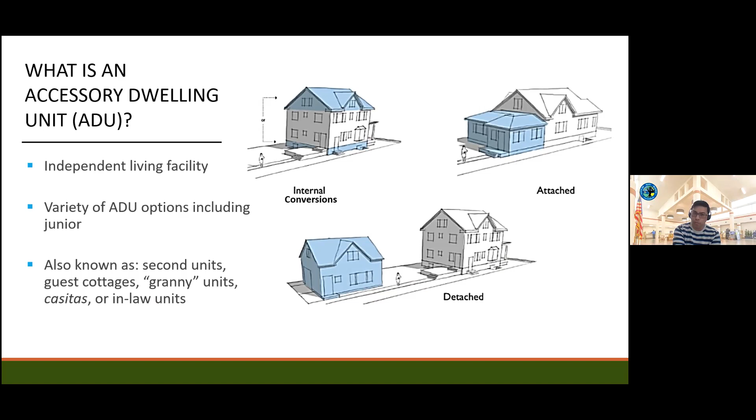They can be attached or detached, constructed as an addition or as a conversion of an existing space or accessory structure, including garages, sheds, pool houses, things of that nature. And under state law, I did want to mention that manufactured or tiny homes meeting certain requirements are also defined as ADUs.

So what is a junior accessory dwelling unit, or a JADU? A JADU is contained entirely within the walls of an existing or proposed single-family residence. JADUs are not permitted in multifamily zoning districts. This is typically a conversion of an existing bedroom or an attached garage. One of the primary distinguishing differences between an ADU and a JADU is that a JADU may share bathroom facilities with the primary residence.

Before we go into the specifics of the new state regulations, it's important to go over some of the key terms that you'll be hearing throughout this presentation. We'll have plenty of time at the end of the presentation, or during the presentation, to answer any questions and provide clarity before you respond to the poll questions.

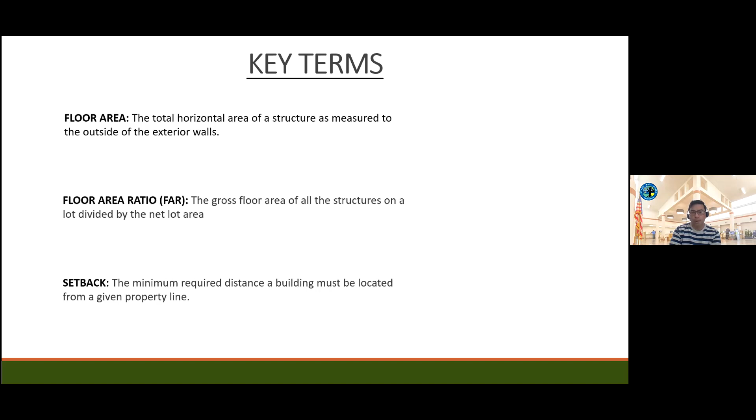We'll begin with floor area. Floor area is simply the area of a structure measured horizontally to the outside surface of the wall. In the example shown on the screen, you have a structure measuring 20 feet by 50 feet, which means the floor area for the structure would be 1,000 square feet.

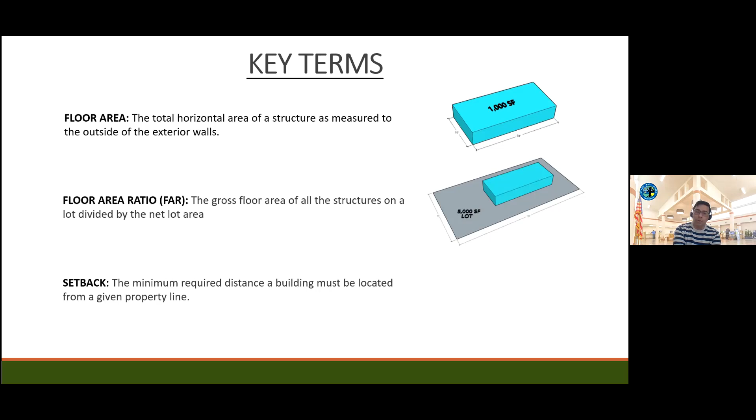The second key term you'll often hear in conjunction with floor area is floor area ratio. You get FAR by calculating the total floor area on a given site and dividing it by the lot area. Using the same example of the 1,000 square foot structure, you have a 5,000 square foot lot. That would end up being calculated as 20% FAR for the site. Each of our zoning districts prescribes its own maximum FAR for development.

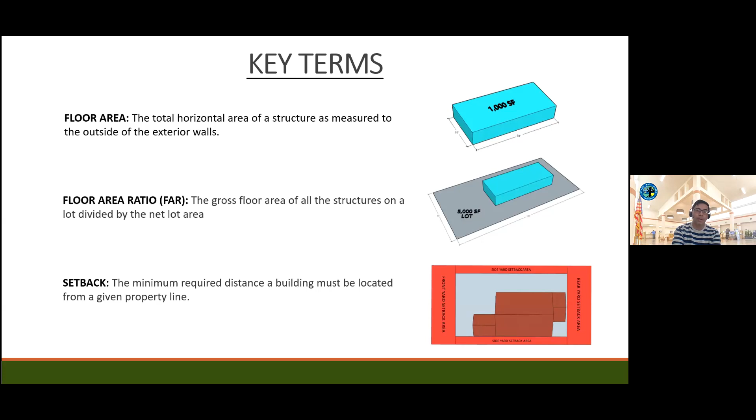Another key term you'll hear referenced is setback, or required setback area. The setback area is the minimum required distance a building must be from a given property line. The area within a required setback is generally required to be unobstructed by any structure or building. The red areas shown on this graphic represent the front, side, and rear setbacks. The gray area in the center of the lot is the buildable area, and that's where you can locate your building or structure.

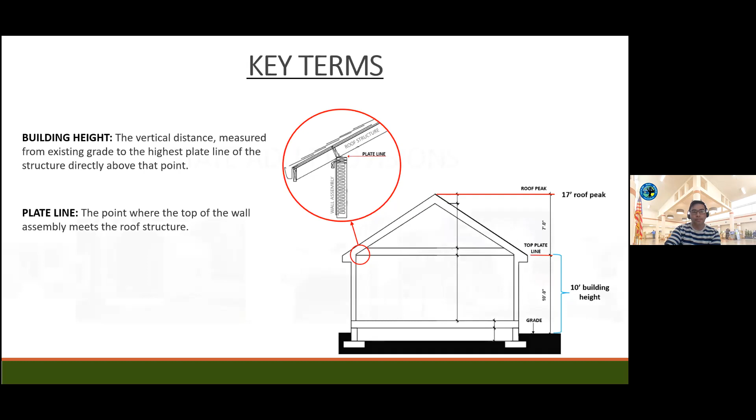The next few slides will discuss the provisions of the new state ADU regulations. Our existing local ordinance is not in complete compliance with the new state regulations, so we're currently imposing only those aspects of our code which are not in conflict with the state. Areas which are in conflict, we're simply defaulting to the state regulations, which we're going to go over now.

A good place to start in terms of what the new state regulations allow is with the state exempted ADU, or what we call a by-right ADU. The state requires that cities allow a property owner to build at minimum an 800 square foot ADU of at least 16 feet with 4-foot side and rear yard setbacks of no more than 4 feet. This by-right ADU is allowed regardless of any local development standard, including lot coverage, floor area ratio, open space requirements, or anything that would otherwise preclude it from being built.

This obviously opens up the doors of opportunity for ADU development in our city and across the state. Generally speaking, the remaining floor area ratio on a lot is what typically governs how that lot can be further developed.

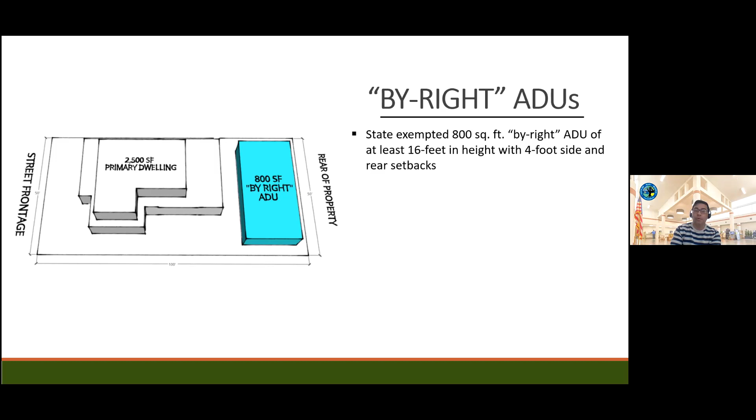In this example, we have a 5,000 square foot lot in an R1C zoning district, which has a prescribed maximum of 50% FAR. That means the maximum floor area, or total amount of structure that could be built on this lot, would be 2,500 square feet. In this scenario, you see the representation of a 2-story home that's maxed out at 2,500 square feet.

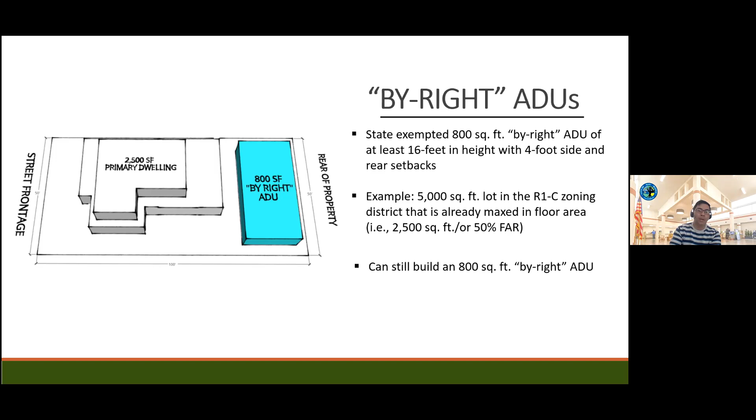What the state exempted ADU, or by-right ADU, provides is that regardless of this lot already being fully developed with 2,500 square feet, the state says you can still build an 800 square foot ADU that's at least 16 feet in height with 4-foot side and rear setbacks.

The updated state law prescribes ADU size limits for agencies which don't have an ADU ordinance in place. Minimum and maximum size allowances are based on the ADU development type, which can be broken down into the general categories of attached, detached, and conversion ADUs, as well as the by-right ADU.

An attached ADU is simply a new construction ADU which is attached to either the primary residence or an accessory structure. We're currently defaulting to the state regulations that permit an attached ADU to be up to 50% of the primary residence's size. Please note that any new construction attached ADU must abide by the 4-foot side and rear setback requirement.

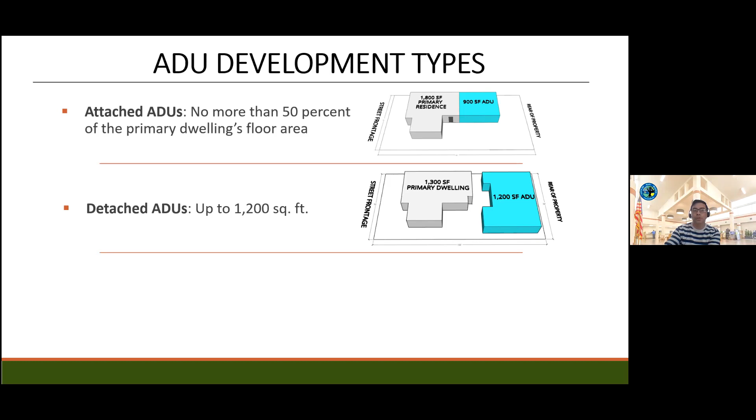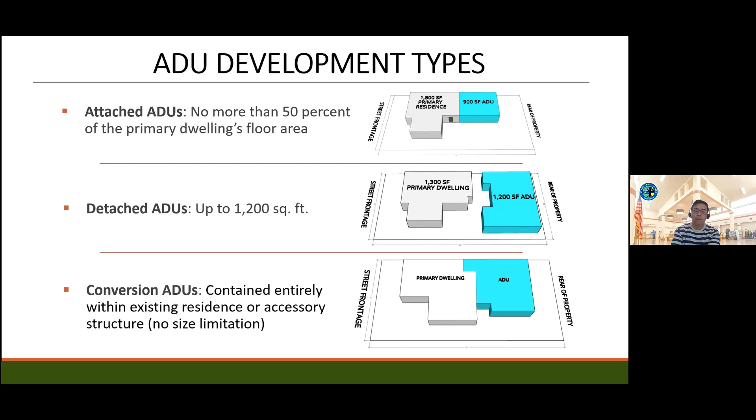So there's plenty of remaining floor area to potentially build up to the state maximum 1,200 square foot detached ADU in this scenario. An ADU conversion is simply a converted area contained entirely within the footprint of an existing residence or even an accessory structure. As such, you can utilize the existing setbacks, even legal non-conforming setbacks, provided that you build in the same location to the same dimensions. There is no size limitation on the area being converted since it's not creating new structure.

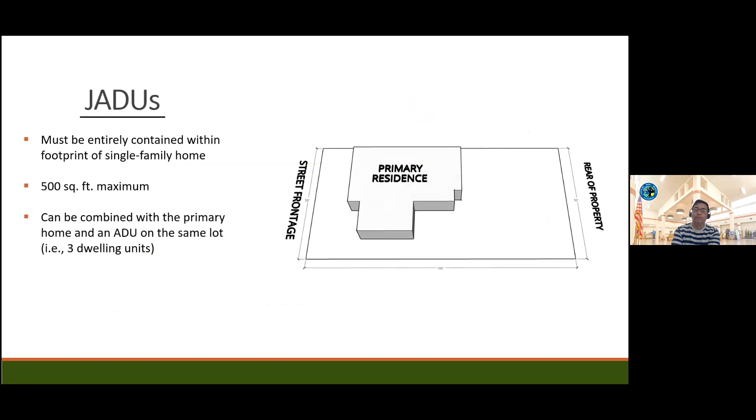JADUs must be contained entirely within the footprint of a single family residence. They're permitted to be up to 500 square feet in size and require exterior access apart from the main residence, as well as internal communication with the primary residence. The JADU must include at least an efficiency kitchen, meaning it must include a cooking facility with appliances, a food preparation counter, and storage cabinets. There's no required parking associated with JADU development.

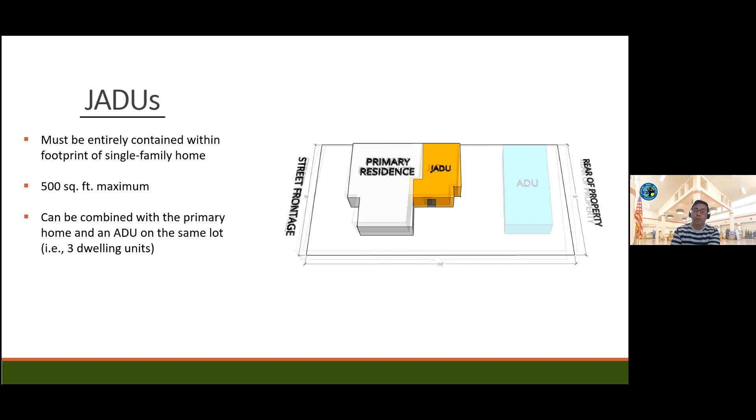One of the interesting provisions of the new state regulations is that it allows an ADU and a JADU to be combined on the same lot with a single family residence, so you effectively can have up to 3 dwelling units on the same lot.

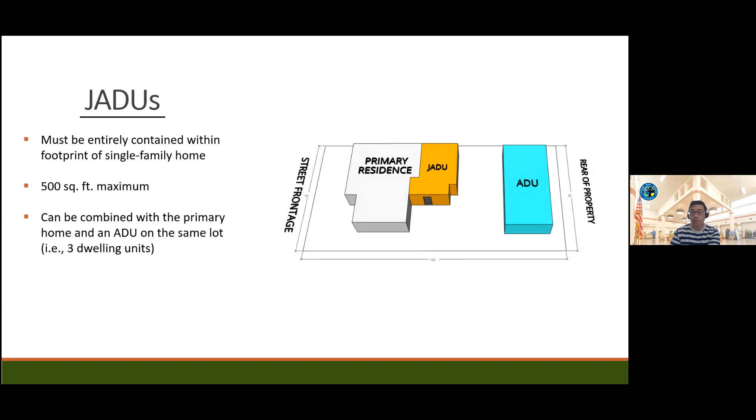We've discussed how we measure building height in San Mateo. So when we speak to allowing an ADU to be at least 16 feet in height, we're talking about allowing the plate height of at least 16 feet in height.

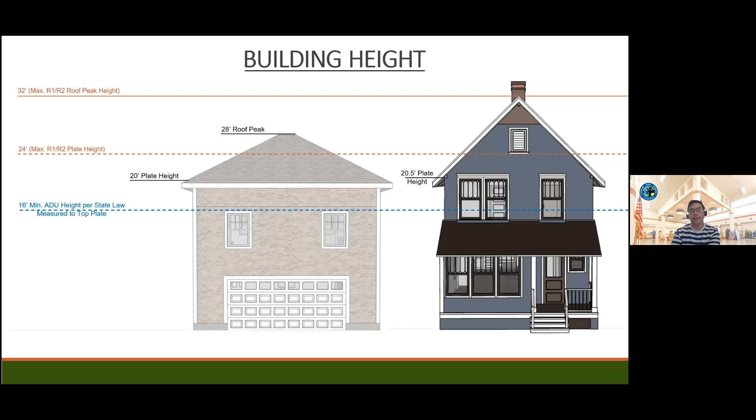With regard to parking associated with ADU development, the state requires 1 off-street parking space per ADU or per bedroom, whichever is less. The recent regulations continue a trend of being more permissive and not allowing required parking to be an impediment to ADU development. One of the new requirements stipulates that when you convert a garage or a carport, or demolish it in conjunction with developing an ADU in its place, you're not required to provide replacement parking.

Additionally, the state offers a number of parking exemptions that preclude the need to provide off-street parking associated with ADU development. Generally speaking, most properties in the city qualify for exemption number 1, which applies when an ADU is located within a half mile walking distance of public transit. Despite that, I wanted to note that approximately 10% of our residential properties are not located or would not satisfy that criteria, and therefore would be obligated to provide off-street parking associated with the ADU.

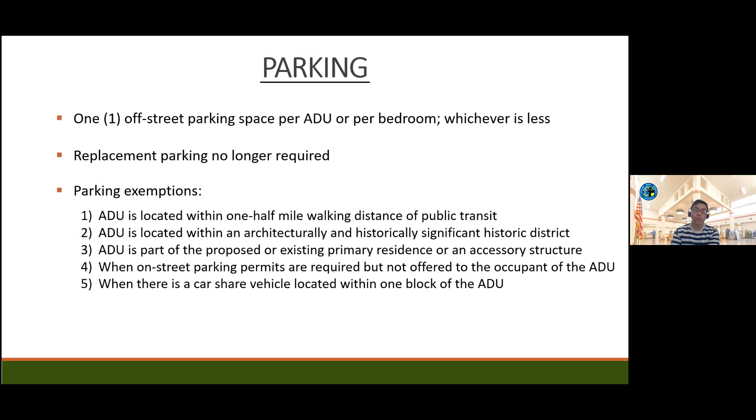In terms of additional special provisions of the new state law, the state law now provides a pathway for homeowners to defer correction of certain building code violations for up to 5 years upon request, provided that the correction of that specific violation is not necessary to protect health and safety. This obviously provides the benefit of legalizing many ADUs that cannot be brought up to 100% code compliance.

In addition, the state now allows ADUs to be developed on lots that have an existing multifamily development. So you can develop or have multiple ADUs within non-living spaces within a multifamily development, meaning you could have it in a boiler room, a storage room, carport, or garage. You can convert up to 25% of the existing units in that multifamily development into ADUs, as well as build up to 2 detached ADUs on that site.

At this time, I wanted to open it up to the attendees to ask any questions. I know that we went over a lot of technical information, and just by the nature of the topic, it's sort of dense and very nuanced. So I'm happy to answer your questions.

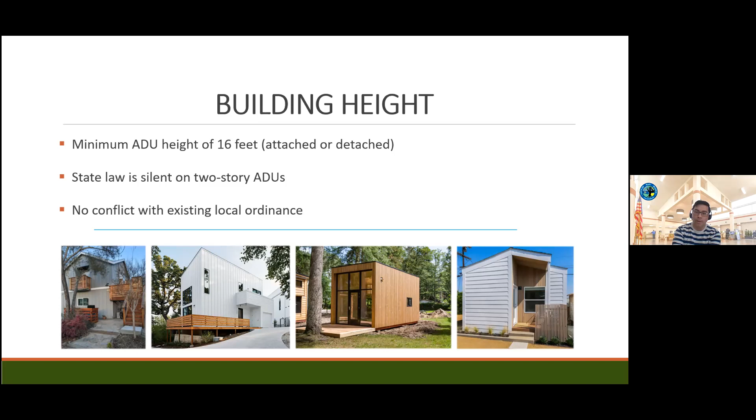State law establishes that an ADU will be allowed to be at least 16 feet in height. Our code currently defaults to the building height maximum specified by the underlying zoning district for ADUs. However, our existing ordinance was adopted during a time when ADUs were not permitted in multifamily zoning districts and were restricted to just 640 square feet. All of the residential zoning districts in our city allow building heights well above 16 feet, so we can continue to default to that underlying zoning district. However, now that ADUs can be built up to 1,200 square feet and built within 4 feet of shared side property lines, we're interested in hearing from you how tall detached ADUs should be.

Going back to that graphic we looked at earlier, these are 3 examples of proposed maximum plate and roof peak heights, which coincide with the answer choices on the poll: a 16-foot plate height with 24-foot roof, a 20-foot plate height with 28-foot roof peak, and a 24-foot plate height with 32-foot roof peak height, which is utilized by our R1 and R2 zoning districts. Mary, can you please pull up poll question number 1?

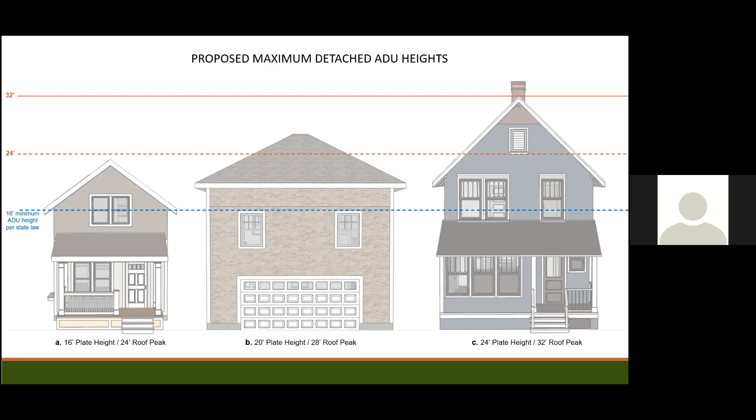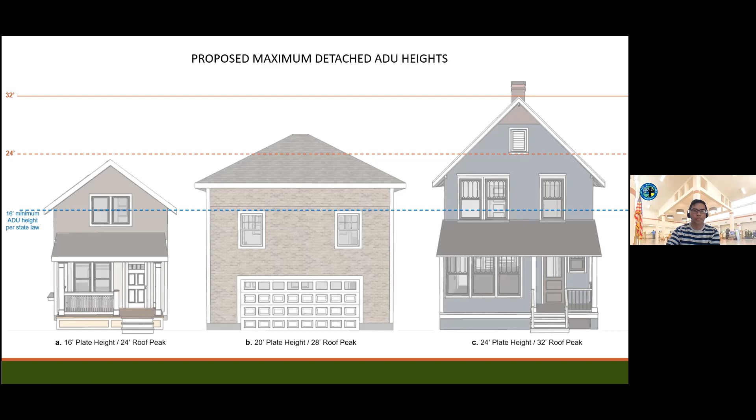And we'll move on. So the state law mandates that ADUs are permitted ministerially through a building permit process. However, while ADUs are exempt from discretionary review, the state does allow for objective architectural standards to be imposed. Some examples from our existing local ordinance that can still be imposed include offsetting windows from neighboring properties to maximize privacy, and requiring ADUs to be constructed of the same architectural style and exterior material finishes and paint scheme as the primary residence. With that in mind, we have the following 2 poll questions regarding objective architectural standards.

Mary, can you please pull up poll question number 2? This is asking what design features of a detached ADU should match the primary home. And sorry, to be clear, you can select all that apply, multiple choice. Okay, we'll just give it a few more seconds. Okay, I think, Mary, we can end it there.

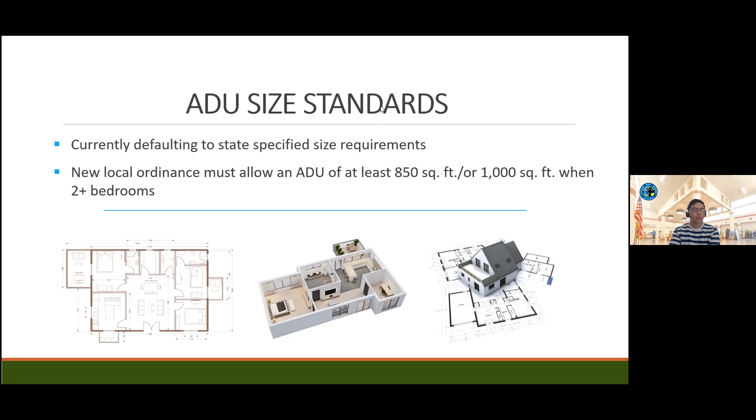For poll question number 5, the state allows cities to impose a restrictive condition on development scenarios when a detached ADU and a JADU are combined with a single family dwelling on the same lot. So we discussed this earlier. This provision allows a local agency to impose the restrictive conditions specified in item 1 and 2.

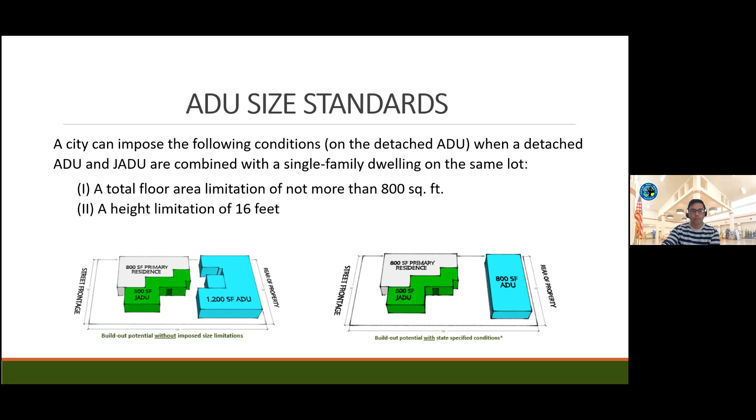With regard to off-street required parking, most residential properties in San Mateo qualify for one of the state's parking exemptions, specifically exemption 1, which exempts required parking for ADUs located within a half mile walking distance of public transit. However, it was noted earlier that approximately 10%, or roughly 2,600 properties, located in one of our residential zoning districts would not qualify for that exemption. So Mary, can you please pull up poll question 7? We'd like to know, should the city exempt all ADU development from required off-street parking? Yes or no?